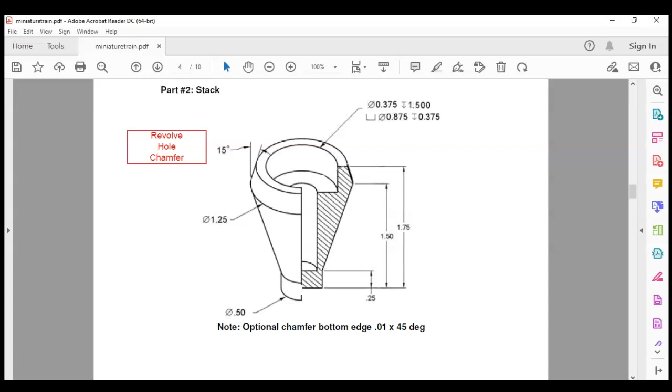So what I'm going to draw is, I'll get the highlight turned on. I'm drawing a profile. I'm not trying to draw the entire stack. I'm only drawing just half of the profile. And you can kind of see it taking place, but I'm given all the dimensions here that I need.

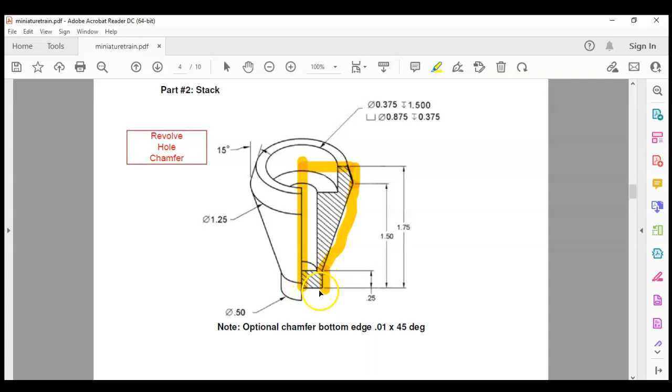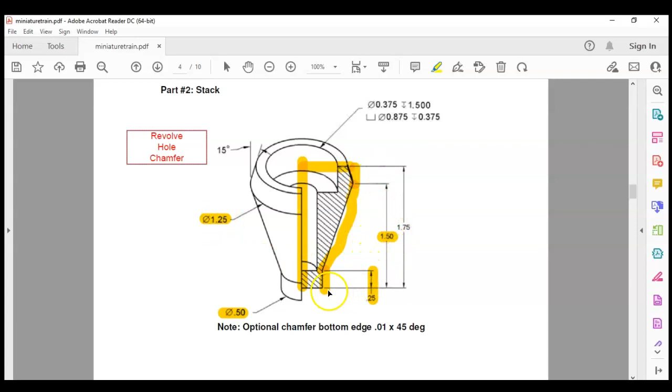I know this bottom cylinder, the bottom part that goes into our train body, is 1/2 inch in diameter, and so I only need half, so 1/4 inch. I know it's 1/4 inch high. The ring in the mid body is 1.25 inches in diameter, which I will need half of. It is 1.5 inches from the base to that ring, and then it's 1.75 inches to the top, and from this ring to the top, it tapers in 15 degrees.

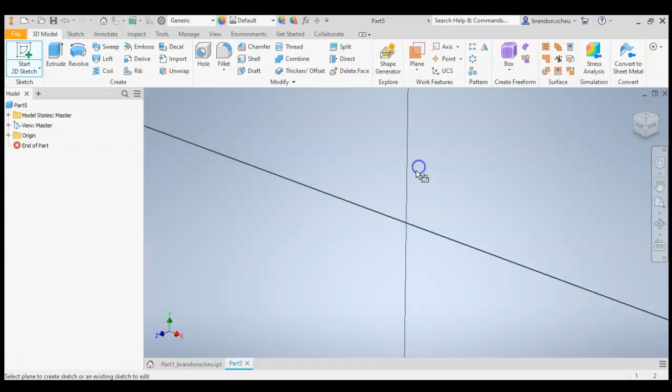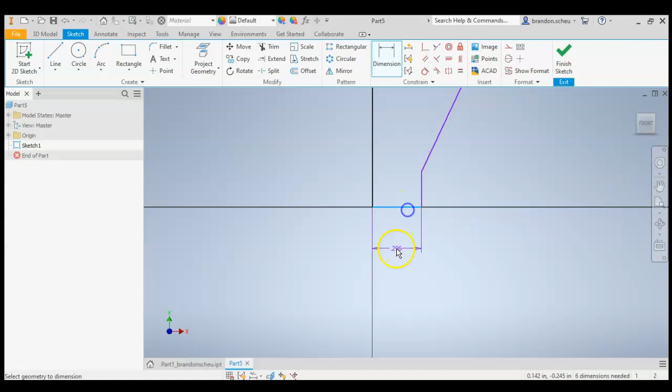I'll show you how to draw it real quickly and use the dimension tool. So we're going to start a 2D sketch. I'm going to use the XY plane, and I'm going to roughly draw out the profile that I need. I want to get it pretty close to the right height. It doesn't have to be perfect, but you can see it's starting to take shape. Then I can come back using dimension, add my dimensions, and it will start changing the drawing for me.

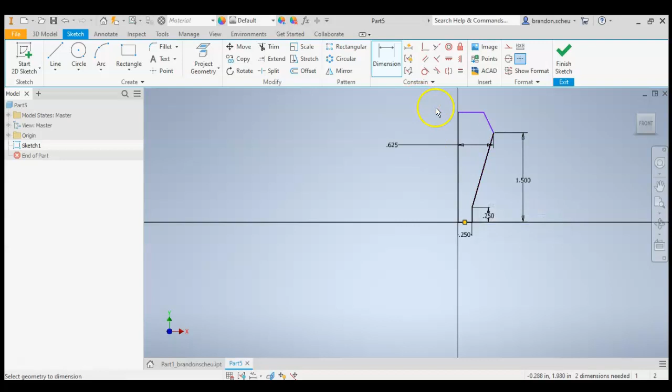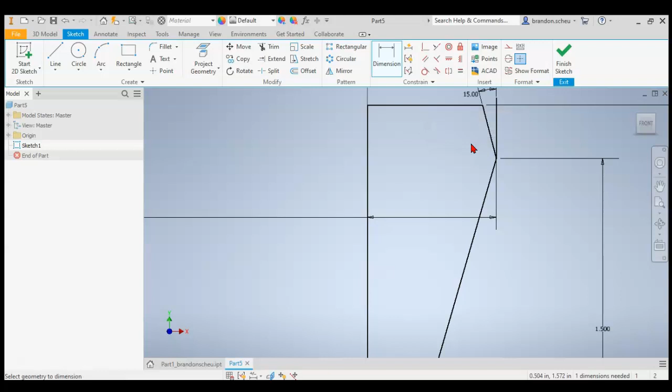I know from this point to my center point is 1.25 divided by 2. It gave me the diameter for that. This is 1.5, and then it's 1.75 to the top. To get this 15-degree taper, I'm going to add a reference line that is just straight vertical, and I know it is 15 degrees from this line to that. Right now it's 35; I'm going to change that to 15. And you can see that what I crudely drew is represented here. I have all my dimensions.

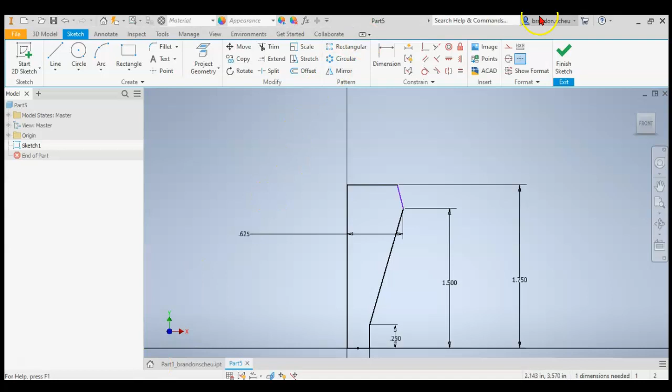Then I'll finish sketch. For revolve, you need a profile. So we have our profile, and we need an axis to revolve it around. We're going to revolve it around this axis there. We hit OK, and you can see now we have the shape of our smokestack.

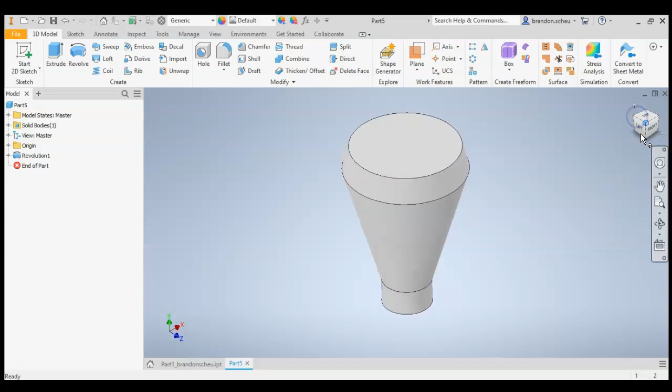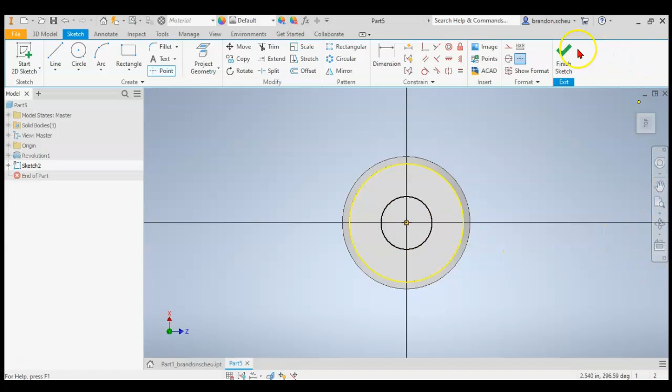We need to come back and add the hole. I'm going to start a 2D sketch on the top. I don't want to offset. I'm going to add in project geometry; it's always good to project geometry. I'm going to add a point at 0, 0, finish sketch, and then create a hole. On this hole, it's already set up, but I'm going to do a simple hole with a counterbore seat. That's going to give me the top hole.

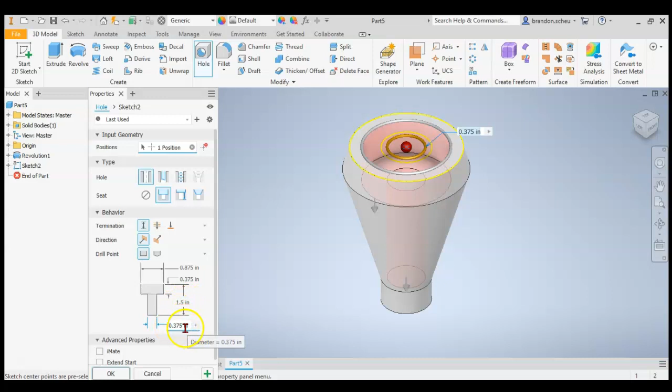Then I can add the rest of my information. The top hole is a diameter of 0.875 and a depth of 0.375. The center hole is a total depth of 1.5 inches with a diameter of 0.375. It is flat on the bottom, so I will hit OK.

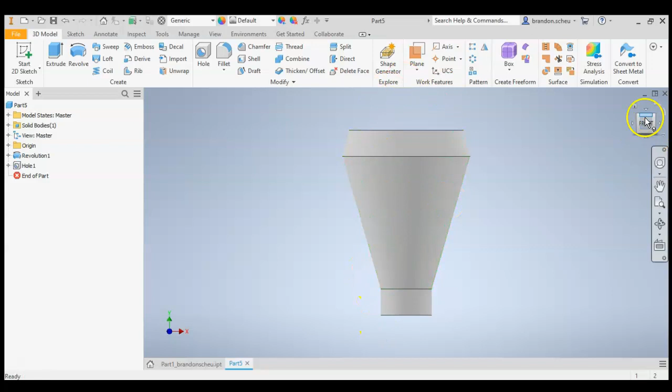Now the only thing I have left is the optional chamfer, 0.01 at 45 degrees at the bottom. It's intended to help if you were to 3D print these, to make it easier to place this in that hole on the train body. So chamfer. Now I have some options: distance and angle. Distance is 0.01, angle is 45.

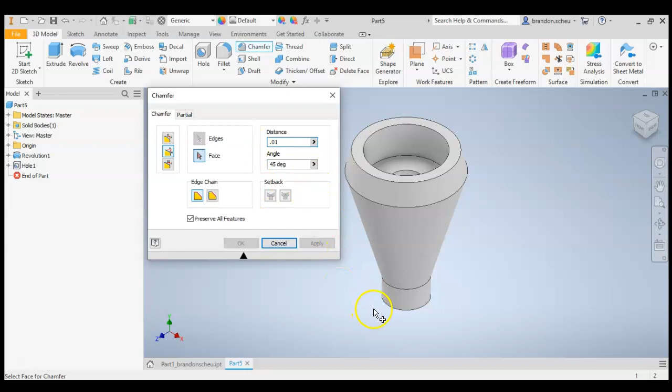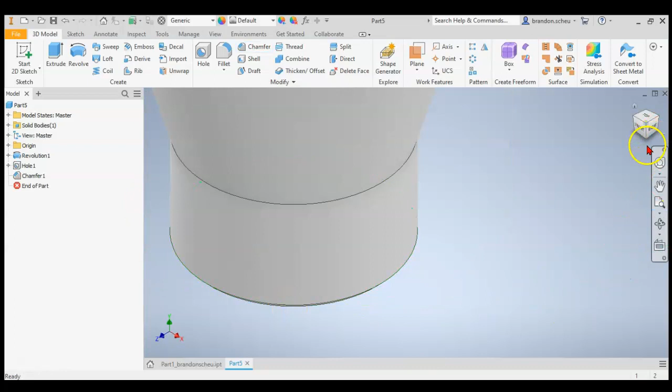I select the edge. I'll go back to 0.01. I want to select that bottom edge, and so now I have a chamfer on the bottom edge. And so that is part 2. We'll do part 3 next.